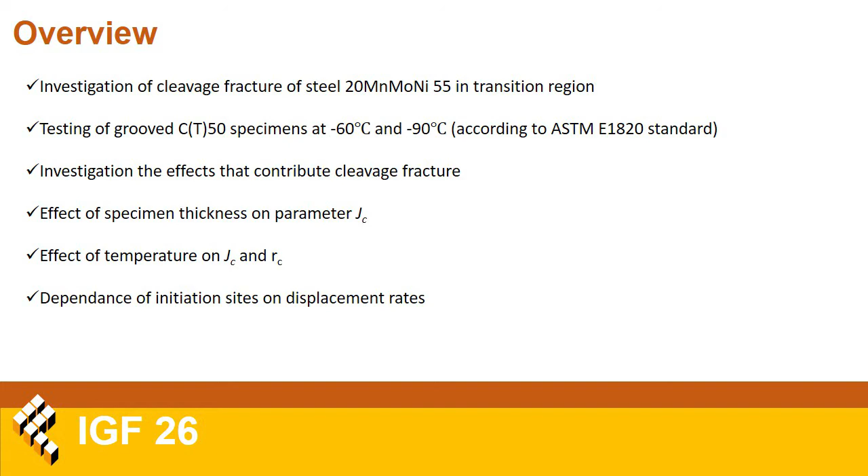This is discussed by analyzing the parameters that you can see on the slide, to be more accurate their scatter, by testing CT50 specimens in the transition temperature region at -60 and -90 degrees Celsius. Some of the previous results were added in this study, which will be presented in the further part of this lecture.

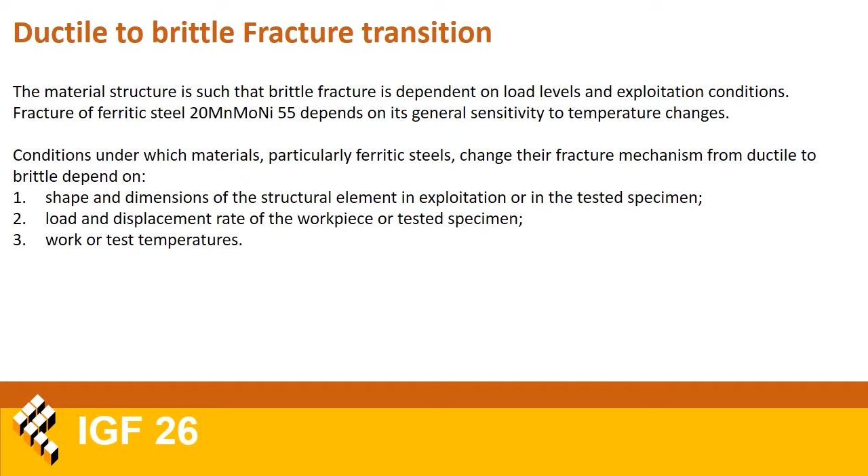A topic of numerous studies over the years involves the extent of working conditions necessary to change the nature of fracture from ductile to brittle and vice versa. In general, this change depends on the material properties. In our case, for steel 20MnMoNi 55, which shows its dependence and general sensitivity to temperature changes.

As it is well known, plane stress and plane strain state define plastic and brittle fracture. Under plane strain, fracture is brittle. One of the ways of achieving a plane strain state in a specimen is to take into account specimen thickness. Larger specimens make fracture more likely to be brittle, as reflected in the relevant measured fracture parameters.

In standard tests carried out for the purposes of determining basic mechanical properties, as well as fracture mechanics parameters, there are two distinctive techniques for defining the loads during testing. The displacement rate for a given specimen can be defined by changing the load over time, in which case the force increment has a constant value, or changing the deformation over time, in which case the deformation increment has a constant value.

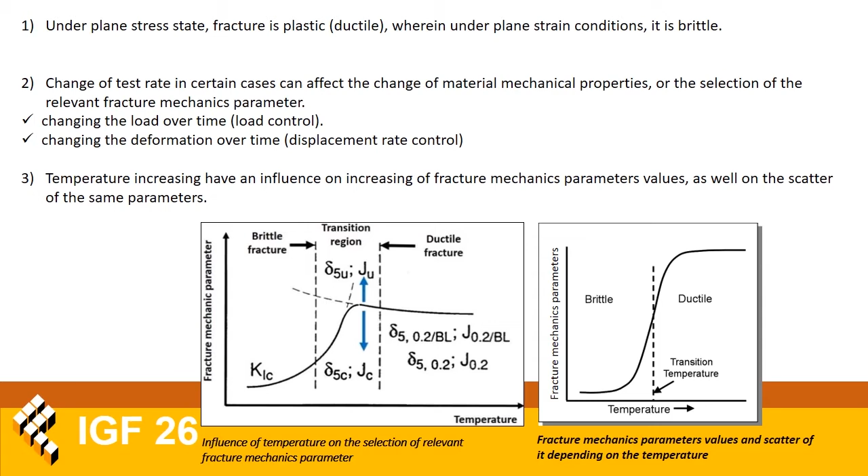Depending on the testing rate, metals can be divided into those not sensitive to it or those whose mechanical properties change with this rate. Numerous studies over time have confirmed that in the case of ferritic steel, the change in temperature also results in the change of mechanical properties, wherein the toughness decreases, and along with it so do the fracture mechanics parameters.

Toughness of steels and alloys meant for low temperature exploitation is typically defined by their transition temperature requirements, and it was experimentally determined that such materials exhibit ductile fracture at higher temperatures and brittle fracture at lower ones.

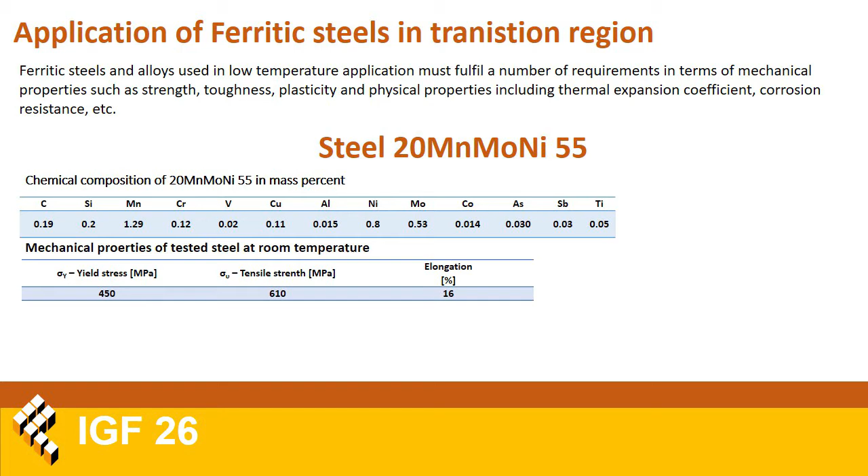The testing of the CT50 specimens made of the previously mentioned steel was carried out at the two temperatures mentioned before. A total of 11 specimens with B net 16 millimeters and 2 millimeter side grooves on both sides were tested in the first set at minus 60 degrees Celsius. This first set of specimens was tested with displacement rates of 0.5 and 0.02 millimeters per minute.

16 specimens with B net 20 millimeters and 2.5 millimeter side grooves on both sides were tested at minus 90 degrees, and the displacement rate was 0.5 millimeters per minute.

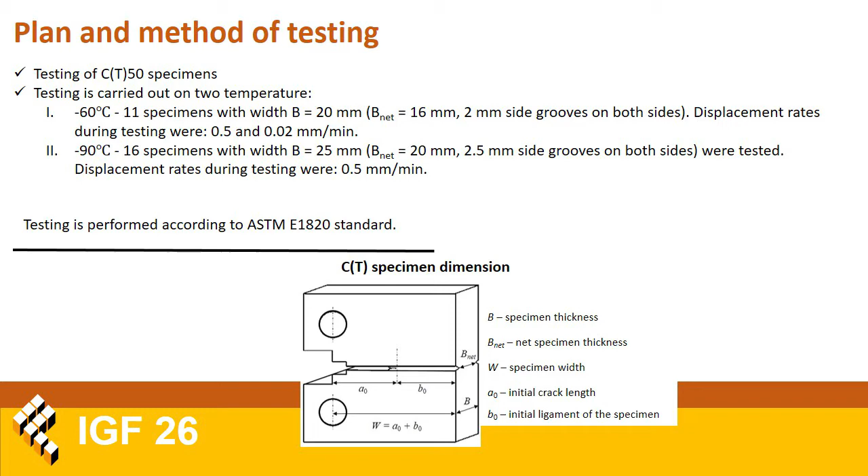It should be emphasized that this study relies on Heerens' work, and other relevant parameters introduced by him were discussed as well, such as the distance between the fatigue crack tip and the cleavage initiation, or simply RC. Besides that, ZC, which represents the distance of RC from the middle line of the specimen thickness, was analyzed,

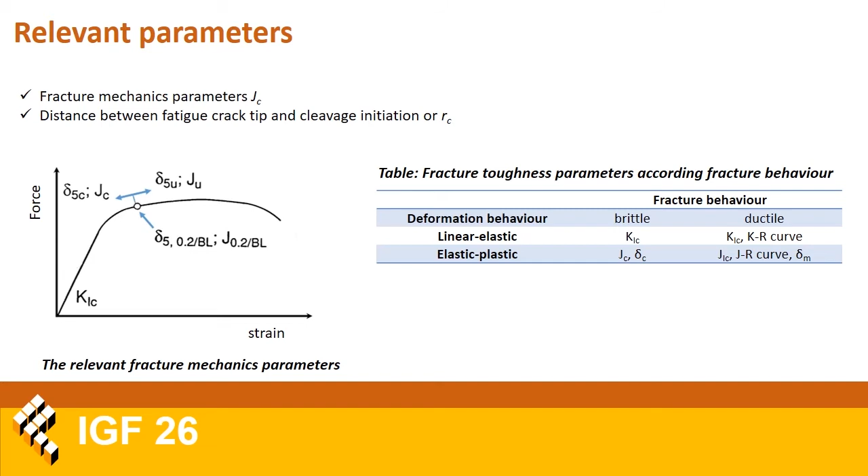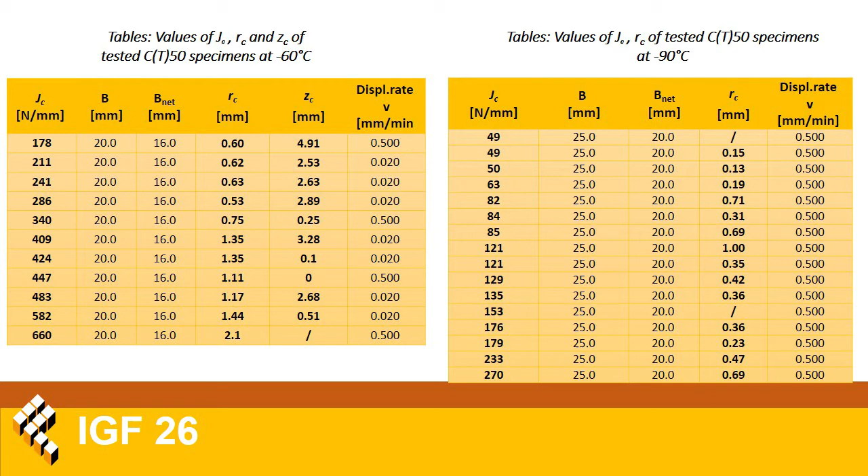And the table on the right side shows the values of JC as well as our values RC for specimens tested at minus 90 degrees Celsius. And to see a bigger picture on the other effects, the results from the previous set of testing are given here.

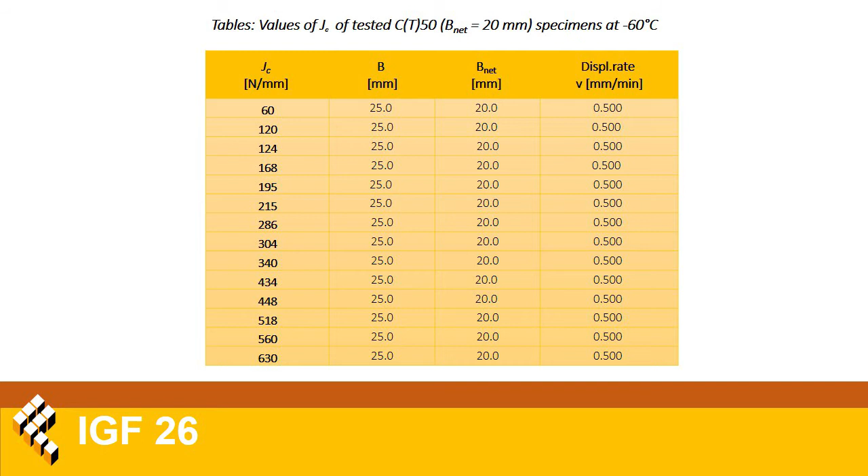Based on the obtained JC values, it can be observed that scatter is greater with temperature increasing, as can be seen on the diagram. As well as the temperature influence on the JC values, the influence of the specimen thickness on the JC values can be observed.

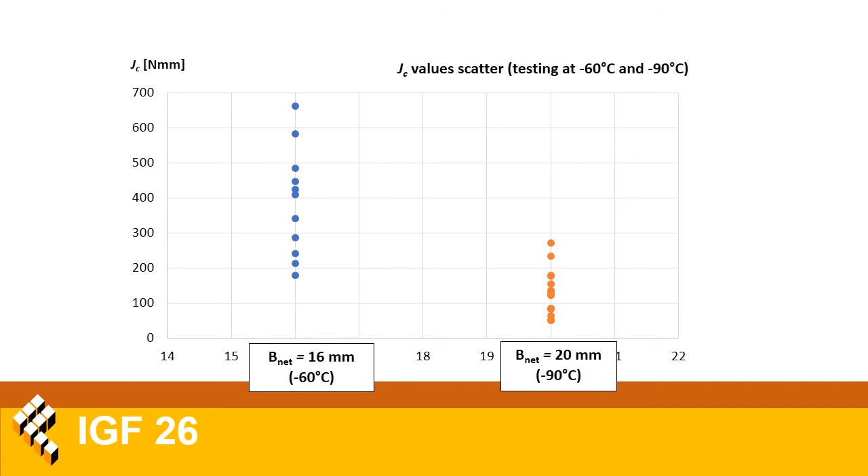This could be attributed to a more plane strain state, which leads to faster fracture of CT specimens. So it looks like this gives more conservative data, but still there is severe scatter of the results, and to be more accurate, scatter of JC values.

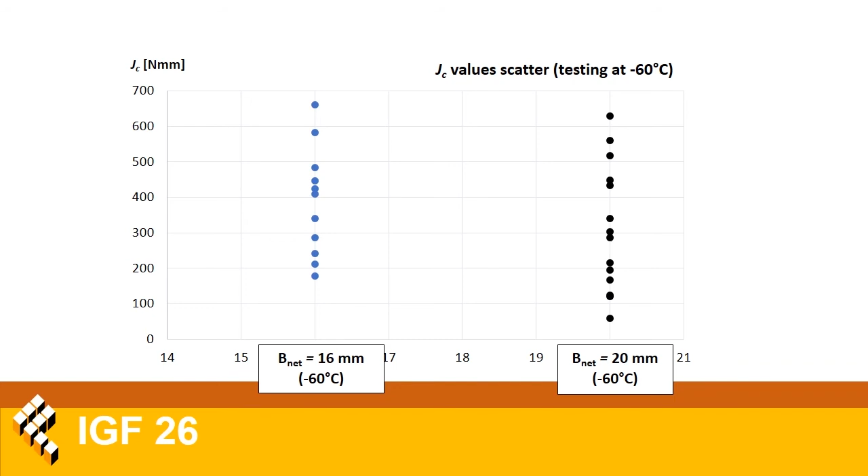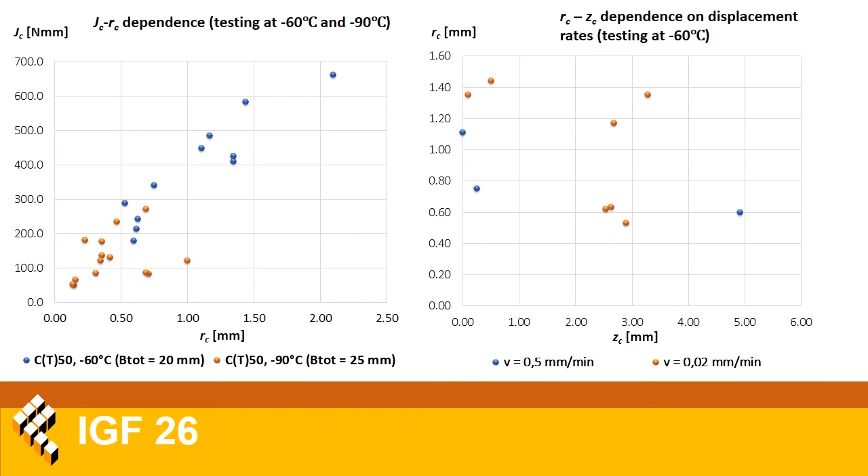From this small number of results, it can be observed that a greater displacement rate during testing causes cleavage initiation to be in the middle of the specimen, but more results are needed to confirm this statement. A few observations could be emphasized.

The scatter of JC parameters is larger with temperature increasing, which can be seen from direct comparison of JC values. The scatter of JC is larger with specimen thickness increasing, but it has not been seen from the results of testing of CT50 specimens with B net of 16 and 20 millimeters. The only thing that could be said is that the thicker specimen gave more conservative results, but the scatter is also large in a very broad range.

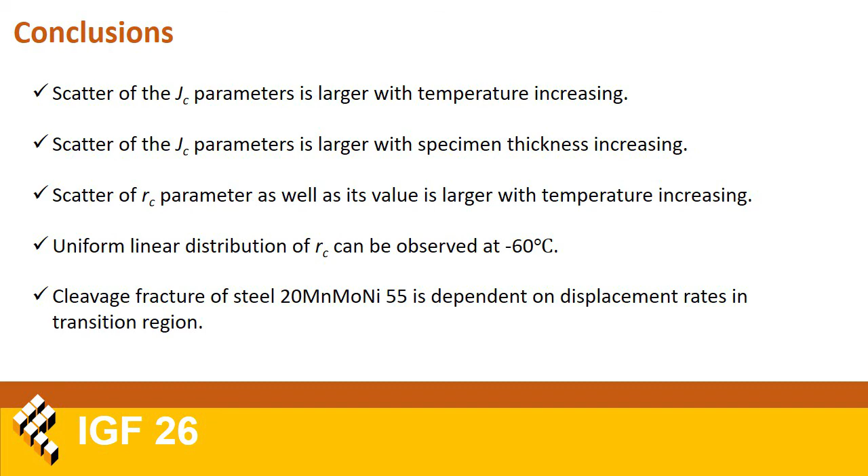Scatter of RC as well as its value is also larger with temperature increasing, and the effect of displacement rates on the cleavage fracture requires more testing and experimental results.